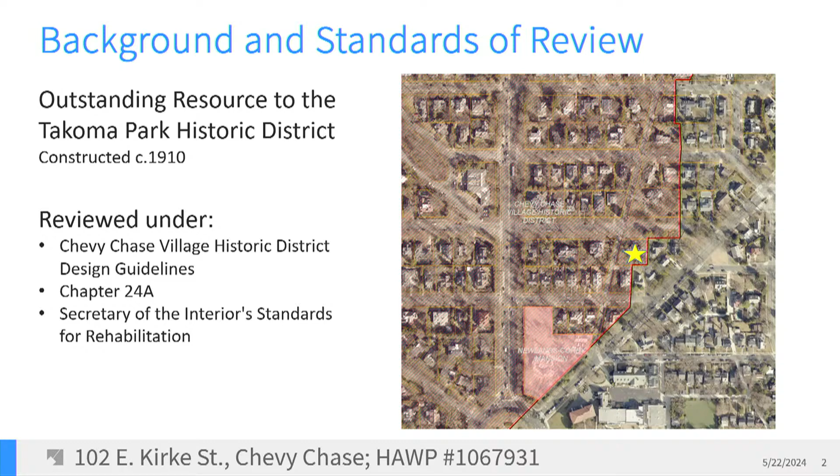Thank you. Please proceed. Okay. It's designated as an outstanding resource to the Takoma Park Historic District, constructed circa 1910, and again this is to be reviewed under the Chevy Chase Village Historic District Design Guidelines, Chapter 24A, and the Secretary of the Interior's Standards for Rehabilitation. So you can see it's on the eastern edge of the historic district line. Just familiarize yourself with the property.

The applicant proposes to demolish the one-story ell and rear deck, construct a two-story addition with a deck in the approximate location of the existing ell, demolish the existing garage and construct a new one slightly to the south, construct a swimming pool and associated patio, replace several existing windows, and there are also some trees that will be removed as part of the proposal.

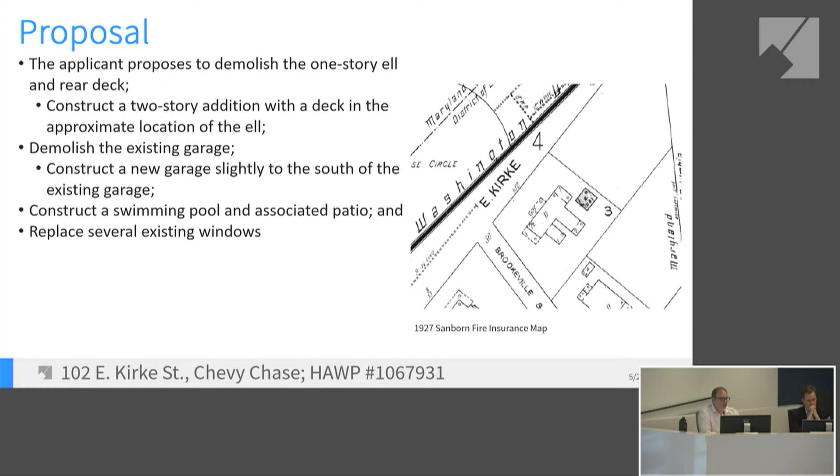Two meetings ago, on April 17th, we held a preliminary consultation on this very same proposal. The HPC was supportive of the partial demolition and agreed that the size, scale, massing, and architectural details of the addition were compatible. They were supportive of demolishing the garage. No one raised objections to the fenestration alterations on the two-story ell, and several commissioners recommended that the garage design be revised to include some of the architectural details from the historic one.

So we'll quickly go through the plans. These are substantially the same plans that you saw at the preliminary consultation. You can see that stone piers were added to the deck, which was one of the other recommendations from some of the commissioners. Again, the one-story portion was to be demolished.

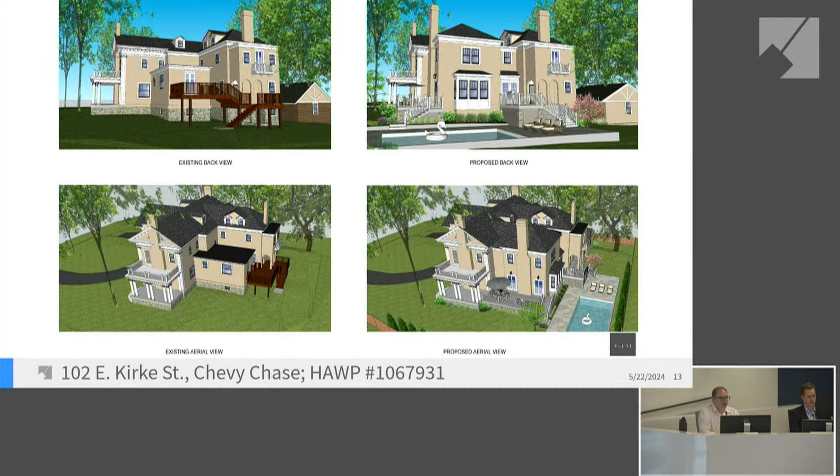Some existing and proposed views, and then the floor plans, and we can refer back to any of these, the new garage plans with the existing garage on the left.

Staff finds that the proposal is generally consistent with the feedback provided by the HPC at the preliminary consultation, and staff recommends the HPC approve the partial demolition and two-story addition under the design guidelines and Chapter 24A-8(b)(2).

Staff finds that the garage has deteriorated beyond repair and that the revised garage design is consistent with the HPC's feedback, and recommends that the demolition and new construction be approved under the design guidelines and 24A8B2 and standards 2, 9, and 10.

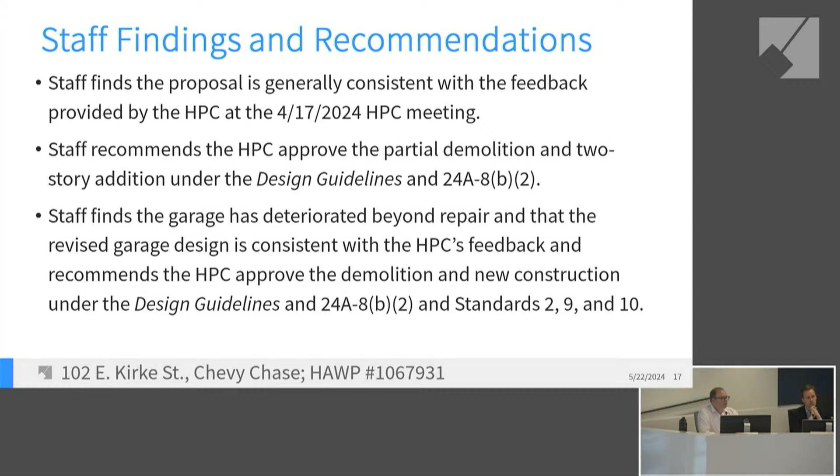Staff finds the proposed pool and patio are appropriately sized for the property and should be approved under a lenient scrutiny review per the design guidelines 24A8B2 and standards 2, 9, and 10.

Staff finds the proposed window replacement will not have a significant impact on the character of the house or surrounding district and should be approved, again, per the design guidelines 24A8B2 and standard 2, provided the HPC includes a condition that the applicant submits detailed drawings of the sunroom windows and the proposed replacement windows for review and approval, and staff recommends that final approval authority be delegated to staff.

Additionally, staff finds the proposed tree removals will not significantly impact the character of the site and surrounding district, and that the district's overall park-like setting will be retained.

The primary reason we're here is to discuss the materials proposed for the new deck on the western side. The applicant provided two materials for consideration: Acre, a manufactured product made primarily of rice hulls, and Aeratis Heritage decking, along with a Liberty extruded PVC railing.

Staff found that neither of those materials were appropriate and instead recommends the HPC require that these features be wood. Decks in Chevy Chase Village are to be reviewed under moderate scrutiny, which involves a higher standard of review than lenient scrutiny. Besides issues of massing, scale, and compatibility, preserving the integrity of the resource is taken into account.

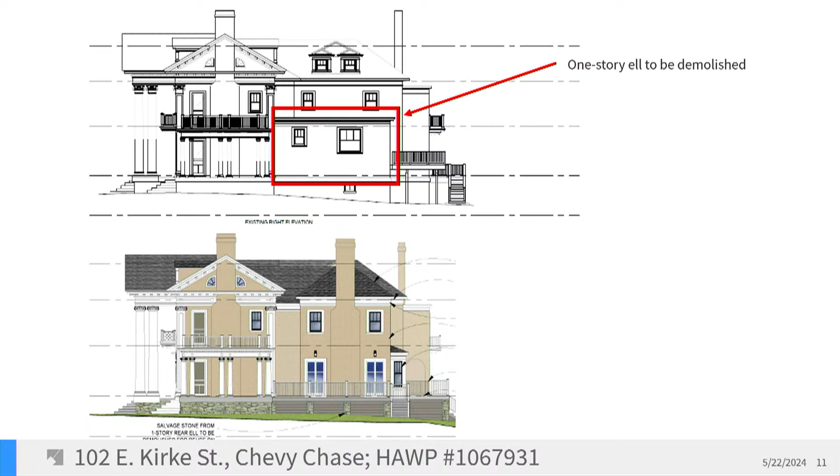We prefer to use a composite trim for that band board and skirting, but we defer to the commission on the appropriateness of final materials there. If absolutely necessary, that could be wood and it could be painted, and it's a vertical surface rather than a horizontal surface, so it's less likely to rot out as quickly as the decking.

But the decking itself just is going to have standing water on it. It's been our experience that those things just don't last no matter what you select.

I understand. How about the staircase that I see in this drawing that's in front of us? The short, maybe six treads. What do you propose for that?

It would be the same materials as the deck for the treads, and then the face would be whatever material we're using for the skirting, preferably a composite material such as Boral or Azek.

We're talking about Aeratis and/or Acre. Have you used any of these products in other applications, and do you have any experience as to longevity?

We've used Aeratis. I believe there's a project in 2012 at 3923 Washington Street in the Kensington Historic District, and the rear deck on that and the side deck as well were both Aeratis, if I remember.

I haven't heard any complaints. I drive by it occasionally. We do have another project down the street, so I can check in on it the next time I'm there. But I think it's holding up great.

I do know that in other historic projects where we've had some sort of other composite material that they've tended to last. In fact, we presented another case two meetings ago where it was a historic deck product, a composite deck product from, I think, the 90s, and it still is in pretty great shape.

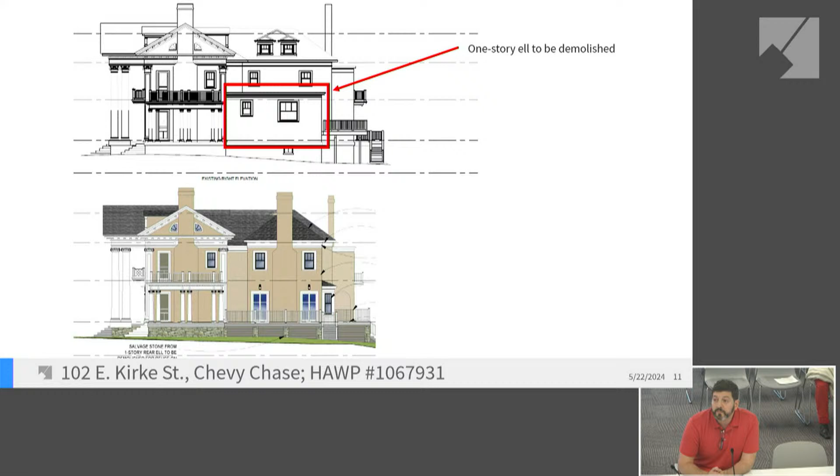Thank you. Any other questions for the applicant? No? Okay.

Any comments? Commissioner Radu: I agree with the architect about distinguishing between the historic and this, since this is still an addition. I understand that it abuts the historic property, but so do many additions where we allow other materials like Hardie planks or other materials. So to me, it seems like this is a compatible material.

It is an addition. I wouldn't agree to replace the deck at the historic porch if it would be wood and they would ask for replacement. I would disagree with that. But it is an addition, hardly visible, so I think this is a compatible material.

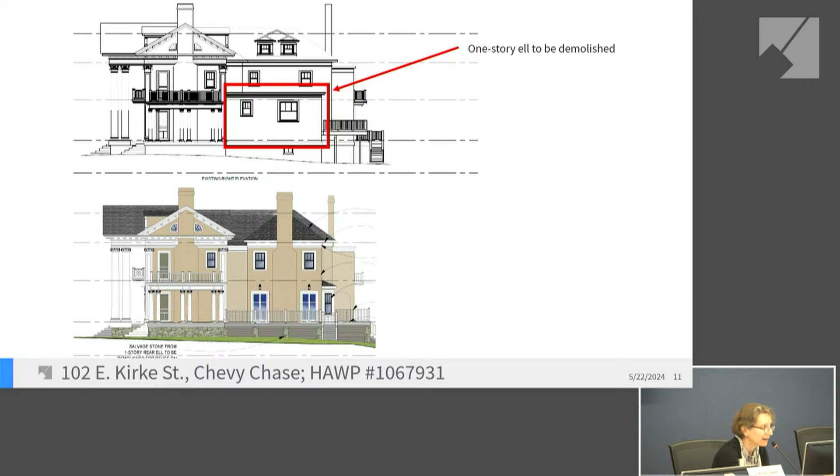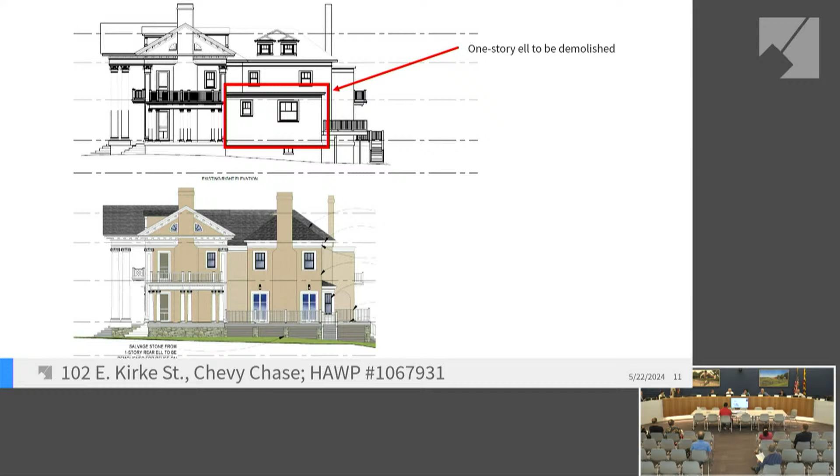Commissioner Doman: I guess I've spoken on this issue before. I'll speak on it again. I see absolutely no reason why this product can't be used. I'm all in favor of the commission adapting to utilization of new and more permanent materials on decking and or also for skirt boards and other items like that. I think this is the way the trend is going.

We have received comments from other LAPs also questioning the use of wood or the demand that the HPC puts out that it has to be wood. I think we have to move forward. There are new products out there.

I've personally seen the Aeratis at Oak Alley outside of New Orleans. It's been there for 7 years. It's painted. You cannot tell that it's not wood.

It is a perfect replica, and it's durable. It has stood up. The people down there, if you talk to them, will tell you this is the best product. I'm also in favor of it, as far as I can tell, a very good product is being used in other homes also in this area.

So I disagree with the staff report on item number 1, that it has to be wood, and I would approve this HAWP, deleting item number 1, but keeping everything else, which seems to have been satisfied by the architect and the homeowner.

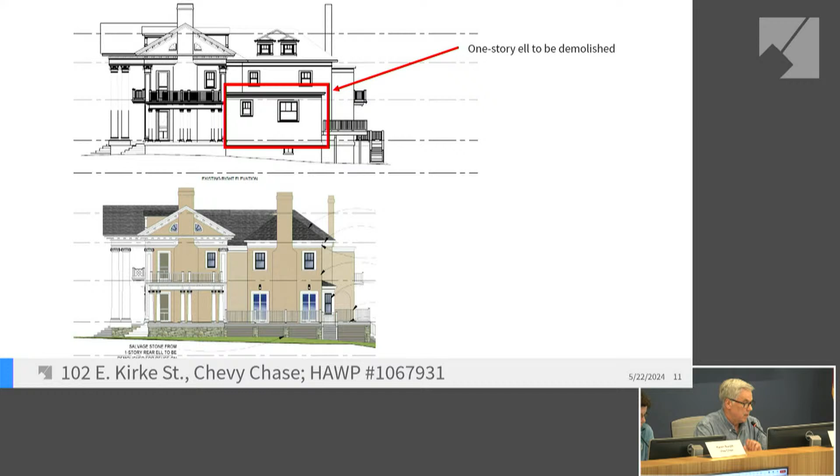Yes, the deck is sizable, you could have tables and chairs out there, certainly, and access down to the yard. I would be more favorable to composites if the new deck stopped basically at the corner of the family room, and that there was a space, a gap between the historic and the new deck.

So that it would not touch physically. I then could feel like I'd be more adaptable to using composites for the railing.

I don't think you're really going to see the deck from the street at eye level, even if the fence wasn't there, and you could walk the entire length of that. Just the horizontal perspective would be very difficult to see. So I don't think the deck itself would have an impact on the resource from the public right-of-way.

But I do think that if it were disconnected and truly was its own element to the addition, it would help distinguish the addition from the historic resource. And I think it makes this problem go away.

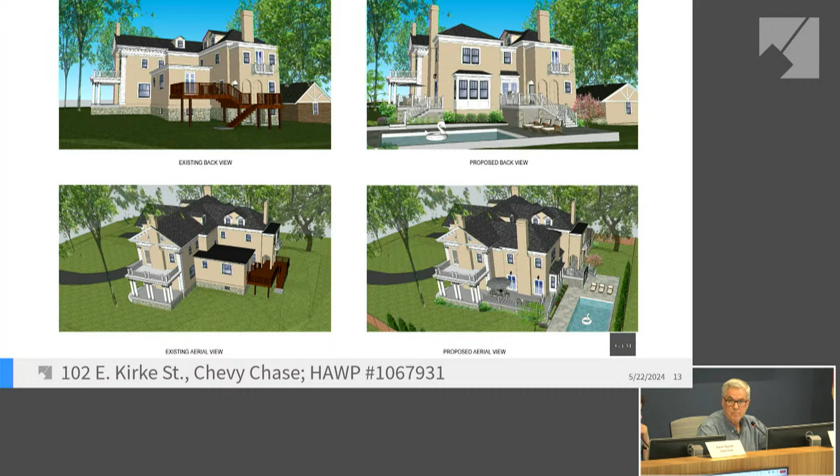Any other comments? Then I'll close this out with my comments. I was not here when this came for preliminary, so I can't really address any issues with the overall design that's already been discussed, other than the issue with this deck and the materials, and the fact that it's touching that historic property, the historic structure.

We are in the process of reviewing the materials for horizontal surfaces at decks and porches, and we've spent quite a lot of time on this, and it's not yet published, I guess I should say. If you'd come back in 2 weeks, it'd probably be published. But that's kind of where we are.

It is a significant topic, it has been for quite a while now. We are looking at materials, we are looking at how to handle this issue as related to the Secretary of the Interior standards with the historic districts, all the different historic districts we address, and how to handle this on a case-by-case basis. But it hasn't been published yet. We're not there yet, we're still dealing with our existing regulations and criteria.

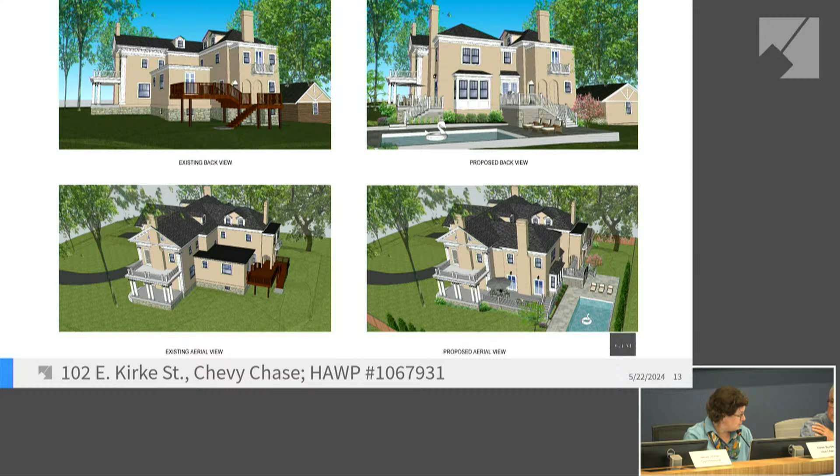Those are my comments. Would somebody like to make a motion about this? Commissioner Haynes? Or, yes ma'am. Madam Vice Chair, the staff would like to offer a few additional thoughts for the commission.

Whether or not we were dealing with a new policy, when there is a new material, a new substitute material proposed for the commission's review and approval, typically we ask for a material sample of that.

Members of the Alternative Porch Flooring Committee have had the opportunity to handle the Aeratis and some of the other materials being proposed, but other members of the commission have not. In a case like this, if we knew this was going to be a topic of conversation, we would have asked for material samples so everybody could consider durability, weight, all aspects of the product, how they do or do not mimic wood, and the construction methods for that material.

In the past, when issues like this have come up, either discrete design or material issues, commissioners in other cases have voted to approve the project except for that item under consideration, tabling it to come back at a later date with more information about the aspects you'd like to see. Or you can approve it as is, and the applicant can ask to amend the HAWP to address those other items or changes at a later date so they can prepare their building permit. These are some other options.

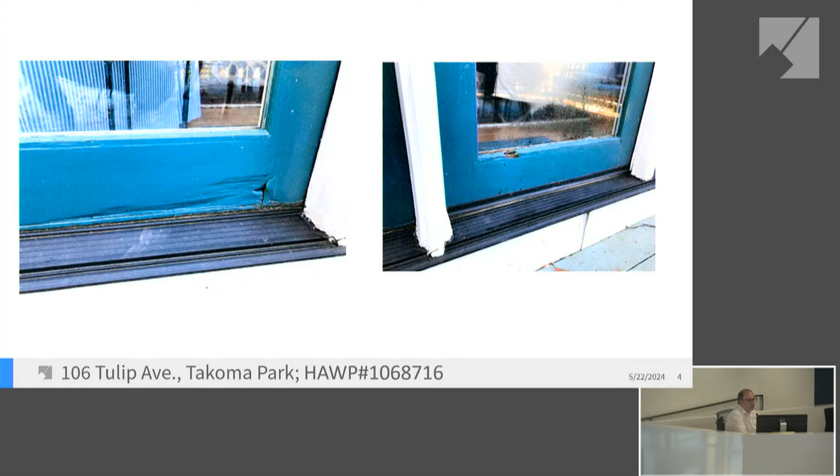This HAWP is to be reviewed under the Takoma Park Historic District Design Guidelines, Chapter 24A, and the Secretary of the Interior's Standards for Rehabilitation. The applicant proposes to remove and replace the existing wood French doors, shown here, which are showing signs of rot and failure. This opening was actually approved by the HPC in a 1995 HAWP, so the doors were installed in either 1995 or 1996. I don't have a date on whether this was later construction or was just enclosed later. The siding changes to a narrower reveal for the shed roof section.

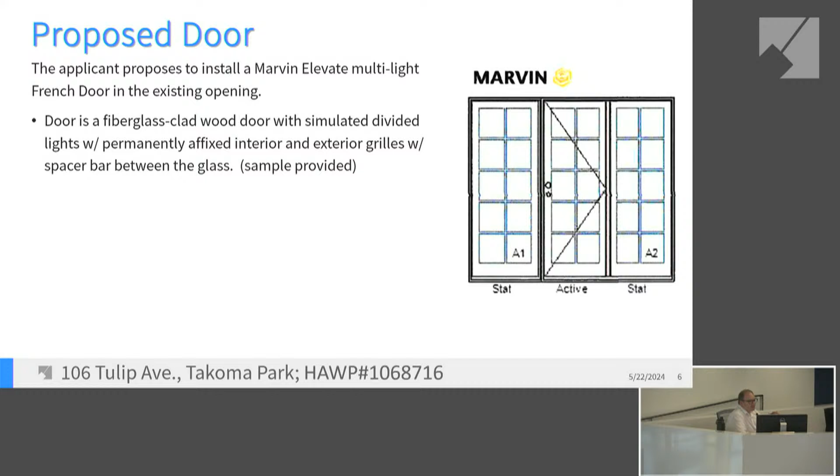The applicant proposes to install a Marvin Elevate multi-light French door into the existing opening. This door is a fiberglass-clad wood door with simulated divided lights, permanently affixed interior and exterior grilles, with a spacer bar between the glass. The applicant provided a sample, which I'll bring out and we can do show and tell shortly.

Staff finds that the subject property is designated as an outstanding resource for its association with B.F. Gilbert, not for its architecture. Gilbert, the founder of Takoma Park, lived at this property while he built his mansion, which subsequently burned down. Staff finds that the existing door opening is not historic, and the north elevation is not at all visible from the public right-of-way.

Staff finds that the existing wood doors have deteriorated and cannot be repaired, and removal is appropriate under 24A8B2 and Standard 2. Staff finds that a wood door would typically be required on an outstanding resource, but because this property is designated for its history and not its architecture, and because this is not a historic opening, and because this door is on the rear, staff finds that a wood or aluminum-clad wood door would be appropriate in this instance. Staff finds that the proposed fiberglass exterior does not have an appropriate finish to be an acceptable substitute for a wood door, as it is too shiny and will not dull over time.

Staff recommends that the HPC approve the removal and replacement of the door with the added condition that the replacement door be either wood or aluminum-clad, with final approval authority delegated to staff. With the recommended conditions, staff finds that the HAWP is consistent with 24A8B1, 2, and D, and Standards 2, 9, and 10. We could do questions or show and tell, whichever the commissioners prefer first.

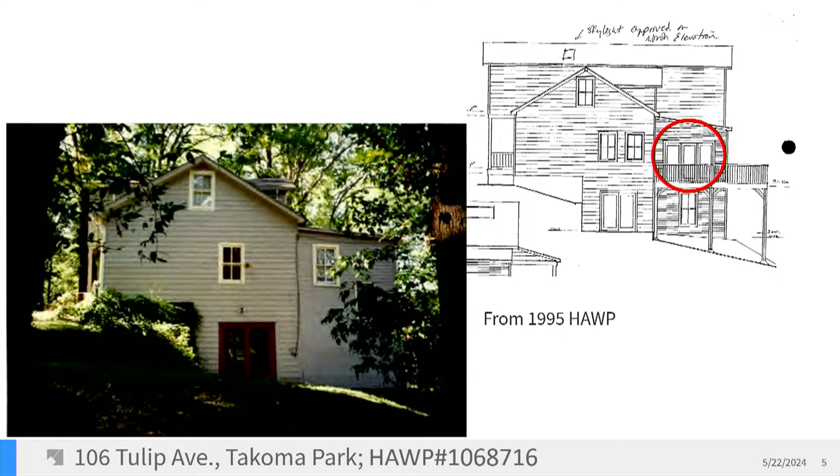Okay, thanks. I have a question for staff. Did I hear correctly that the addition this door is going into is not known, that it's not original, or the age is not known? The age of the portion of the house is unknown, but we can date the opening from our own HAWP records. The image shown comes from the 1995 approved HAWP, which actually created this opening that you see circled in red. So the structure the opening is in is of an unknown date.

Correct, it could be original to the house or not; you just know it's older than the date of the opening. Correct, we don't know the original date of construction for the house, full stop, but we also don't know the age of construction of this portion of it either. Okay, thank you.

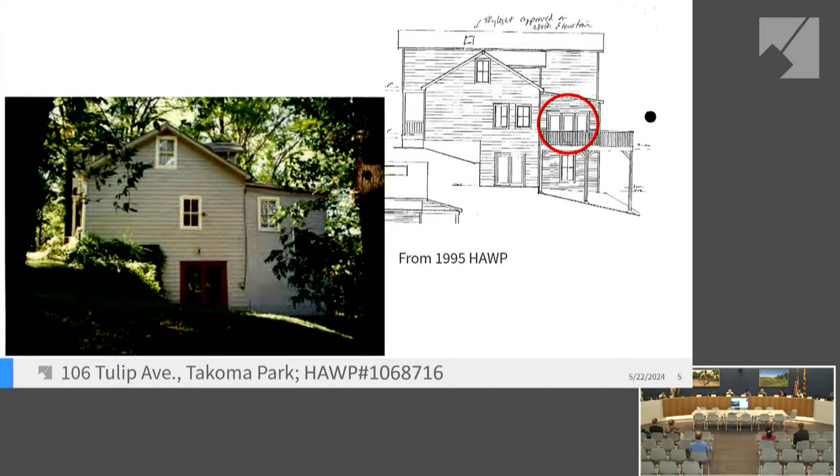Commissioner Haynes. Thank you. Is this door visible from the public right-of-way? No, not at all. Between the change in grade and the distance, conceivably you could—I mean, you can't see it from here, it's too far from the right-of-way. That would be the view if the topography cooperated, but no, it's not at all visible from the right-of-way. Thank you, any other questions?

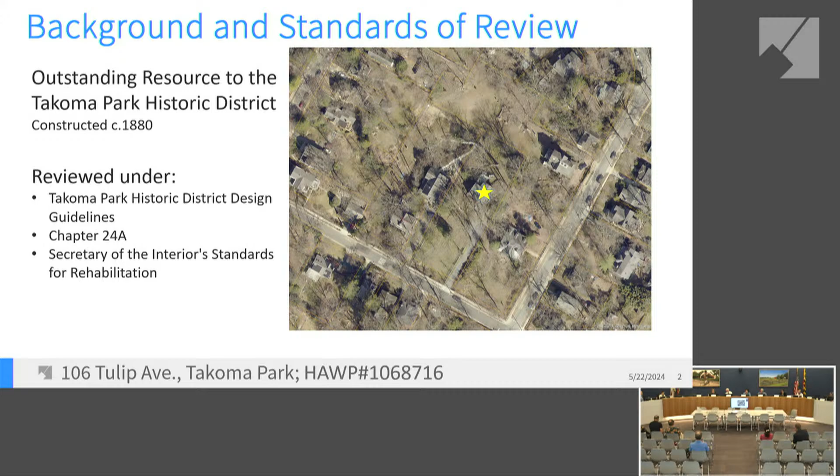If not, the applicants, if anyone's coming forward here live, please do so. If not, the applicants that are on the cloud, or calling in, would you please identify yourselves and your relationship to this project? Thank you.

Hi, good evening, ladies and gentlemen. This is John McDermott, representing Louise Klee for 106 Tulip Ave. I am the contractor who has been helping her with this door and has filed the permit with you guys as well.

I understand there were a couple questions as far as the finish on the fiberglass clad product. It is a matte finish. It is also a full glass door, so there's not much fiberglass at all in the entire product.

It is a very long driveway up to the front of the house. Driving down or walking down that street, there is no sidewalk, it's just a road. I've not been able to see, driving down that road, even remotely close to where the back of the house is. And from my understanding, that was an addition built on the house in 1995. It was stated as a non-historic opening.

Yes, there'll be a very brief staff report this evening. So again, this is a preliminary consultation for Hoyle's Mill, which is a contributing resource to the Boyds Historic District. You can see the lines of the district were drawn to specifically capture this building, which was constructed circa 1915, and it's reviewed under Chapter 24A, the Secretary of the Interior's Standards for Rehabilitation, and the MARC Rail Communities Sector Plan, which was adopted in 2019.

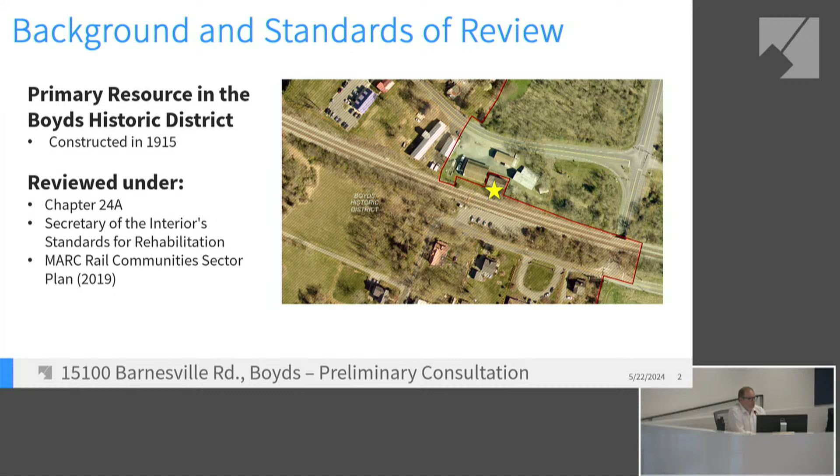So the proposal is to stabilize the building foundation by filling the basement level with a flowable fill concrete. A 2019 assessment found the building to be in poor condition, including holes in the roof and windows that allowed water infiltration. Additional structural deficiencies at the foundation were determined to be the biggest threat to the building's stability, including areas of missing stone, which allowed soil to begin to fill the basement. Last August, the HPC held a preliminary consultation to evaluate the proposed work and to solicit input on a preservation plan for the site.

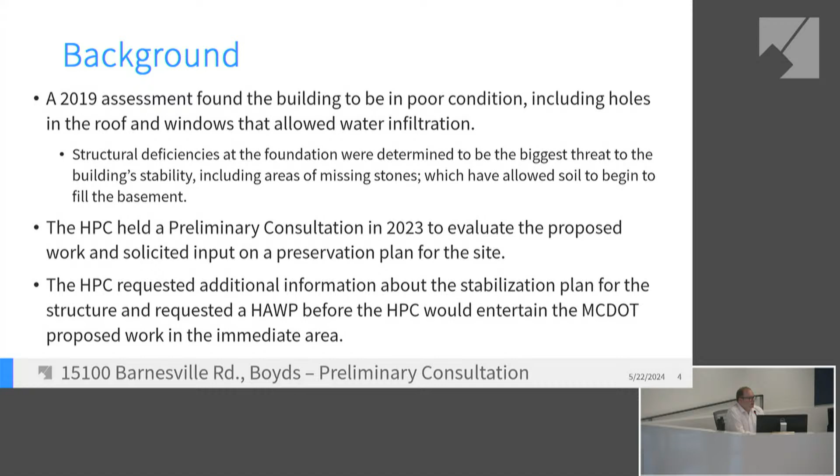The HPC requested additional information about the stabilization plan for the structure and requested a HAWP before the HPC would entertain MCDOT's proposed work in the immediate area.

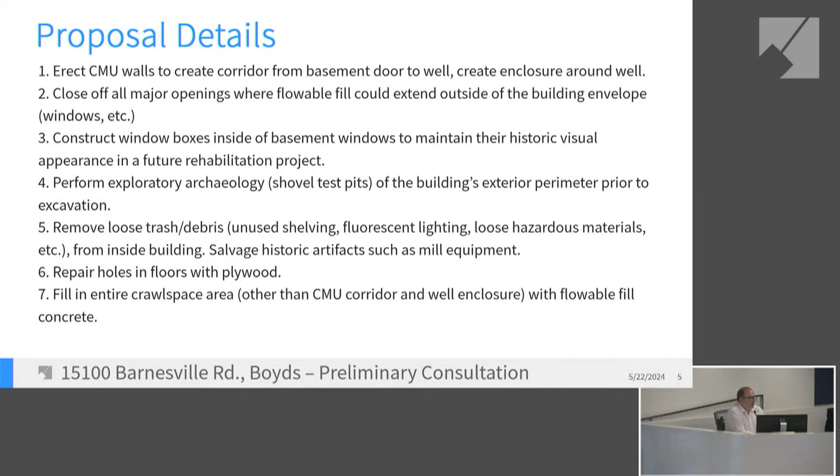Remove and discard the steel stair platform, remove all the power lines, install plywood panels with louvers in the windows, remove and replace deteriorated basement doors and frame with a new steel door and frame, and demolish and replace the existing site stair leading down into the crawl space—although some of these things have changed in the interim—and then clear up any insects and other biological pests.

Staff finds that the existing foundation is failing and the basement is being infiltrated by soil, water, and biological pests, and that the stabilized foundation will allow site access leading to a full-scale rehabilitation and adaptive reuse of the building.

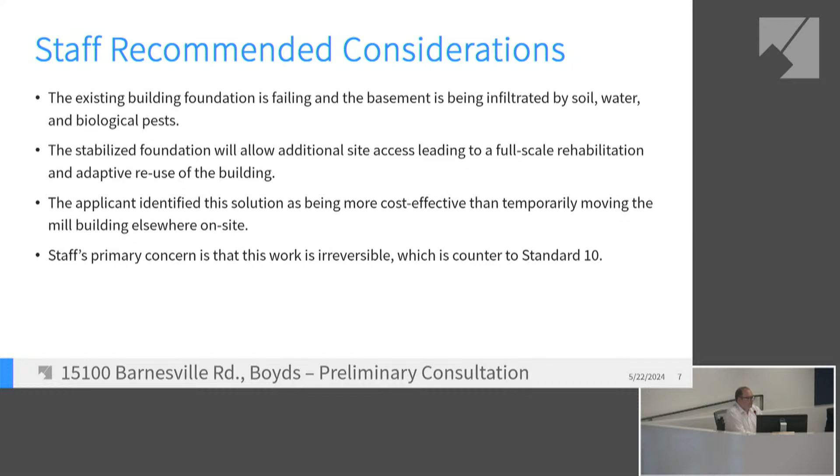The applicant identified this solution as more cost-effective than temporarily moving the entire mill building elsewhere, either on-site or off. While staff is not an engineer, our primary concern with this concept is that the work is irreversible, which would run counter to Standard 10. But there are a number of other considerations we've identified and discussed at previous preliminary consultations.

So the four primary questions for the HPC during this consultation are: does the HPC have any concerns about the proposed work in addition to those identified by staff? Does the HPC find the proposal appropriate under the circumstances? Does the HPC require any additional documentation or calculations with a final HAWP application to stabilize the foundation? And are there any other courses of action the HPC would like the applicant to consider to stabilize the foundation? I will answer any questions you have at this time.

Are there any questions for staff?

Commissioner Burdett: I just want to confirm there were no other alternatives presented. Staff: Correct, this was the proposal presented to staff in this preliminary consultation. If your question is whether other proposals were considered and rejected, that's a question for the applicant, staff can't answer that. Burdett: Yeah, you didn't reject it. Staff: Correct, it was rejected before it got to you.

All right, there are no questions for staff. We'll move on to a presentation by the applicant, who all work for WRA: Brian Barna, Lonnie Hovey, and Pam Destino, joining us virtually. Please give your presentation, and whoever is speaking, identify yourselves and your relationship to this project.

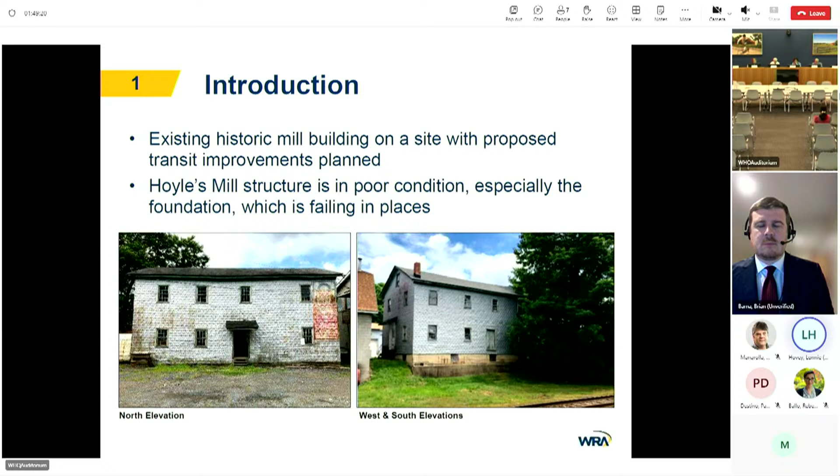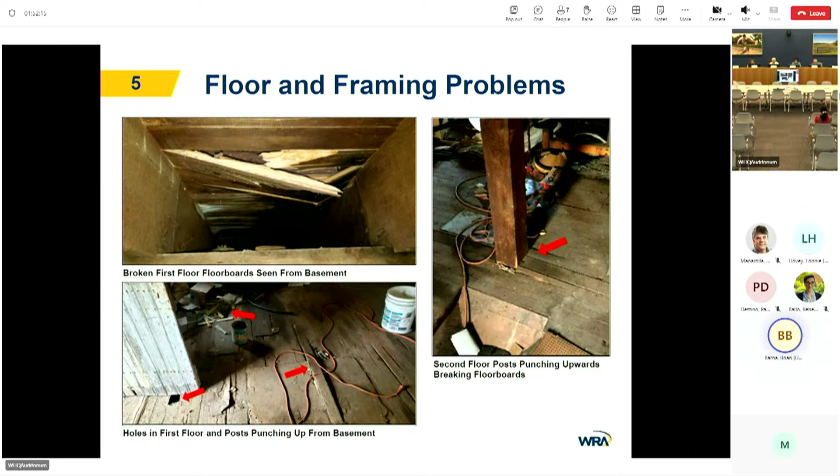So what we are proposing is a foundation stabilization option, and this would consist of flowable fill concrete installed up to grade level, which would retain a small crawl space below the first floor and keep the concrete off of the first floor historic wood structure. Everything we're doing associated with the flowable fill structural stabilization would have no visual impacts to the building exterior.

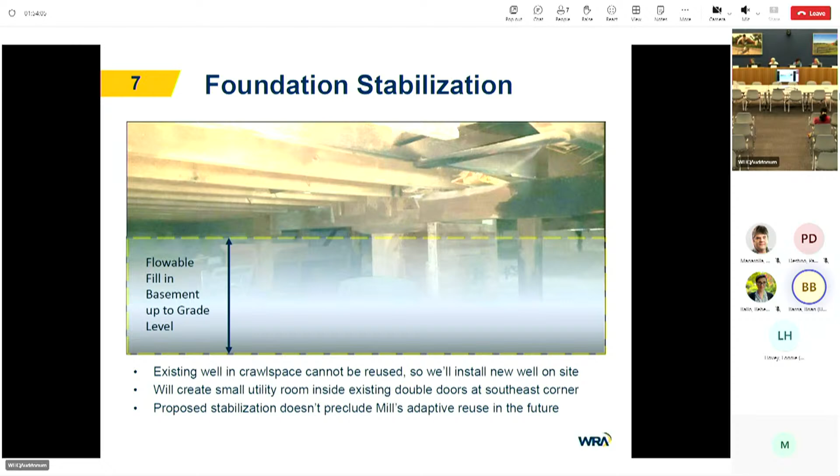Just a couple quick notes on flowable fill. It's essentially concrete, but it's a very low viscosity concrete that will flow into place and requires no compaction.

We're offering this up as an option because the flowable fill will fill in the gaps in the failing foundation and essentially create a new mat foundation for the structure, offering stability for the entire structure and preventing additional differential settlement or further damage to the structure.

We are proposing that first the floorboards of the first floor be temporarily removed, and then the flowable fill can be pumped directly through the first floor into the basement for the protection of the contractors, because they would not need to be in the basement during this work, and it provides good visual control of the flowable fill during construction.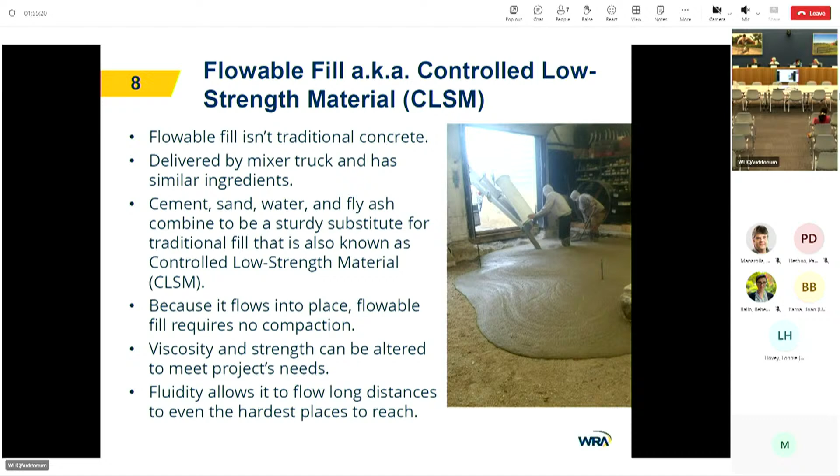The existing doors and stairs are all there, but they've also deteriorated over time, and the stairs and cheek walls have all cracked and need to be replaced.

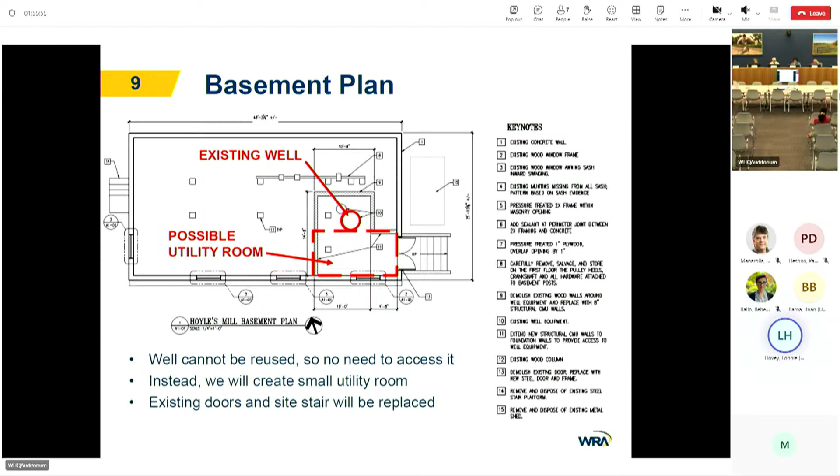There are 4 basement windows, currently boarded over. The remaining original material includes the window frame and sash frame, but no glass or muntins remain. Marks on the sash frame indicate the basement windows had 2 rows of 3 window panes each.

To prevent the flowable fill from going out the windows, we propose creating window boxes behind the existing windows. This will create 8 inches of space, and future restoration of the windows would be done from the outside to retain the look and character of the original windows.

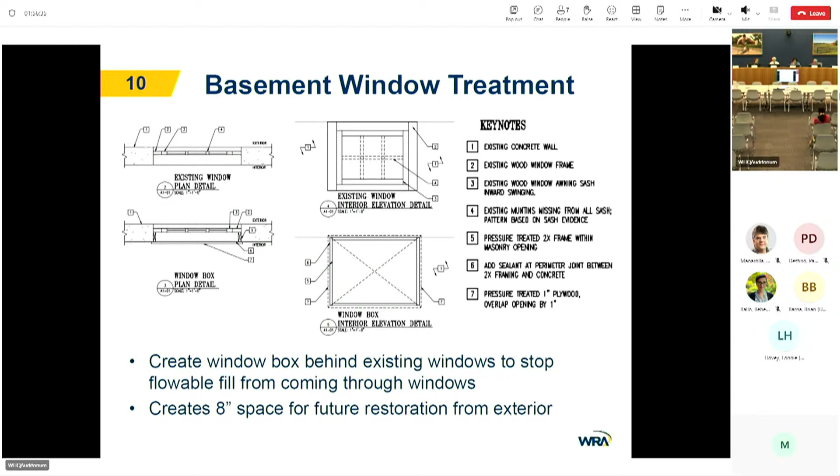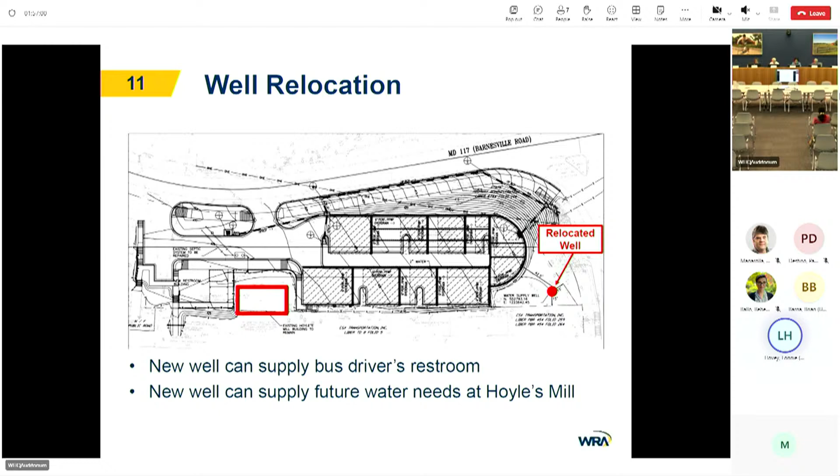Thank you for this opportunity to present our stabilization plans to you.

Thank you. Are there questions for the applicant? Jeff Haynes, Commissioner Haynes? Yes. How much space from the bottom of the floor joist to the top of the concrete fill are you proposing?

Right now, to get up to the mill, there's a couple of steps at the front door and larger steps on the west side because the site slopes downward. But the crawl space would be somewhere between 18 to 20 inches.

Okay, it's kind of tight if there's plumbing work there that might need to be serviced down the road, or other utilities that might need to be serviced. And if you've ever been in an 18-inch crawl space, you better be a pretty thin person. So that's just one functional question. But why do you need to come up that high? Why can't you fill to the top of the existing stone wall?

And is it really about mitigating the soil intrusion into the foundation, or are you tying the existing foundation walls together so that it's this big block of concrete and masonry, and addressing more the structural rationalization for filling it up that much?

Commissioner Radu? Yes, thank you. I'm looking at the package foundation plan drawing, 1S1-01, and you noted that the wall that's in poor condition is on the north side. I saw a section through that well room, and it seems like the northern part is really where the crawl space is, but the southern part is where the windows are, and it's like 8 feet—it's not 2 feet, not just the 3 to 4 feet on the other side.

So I was wondering if you considered some other solution where you would really reinforce the north side, but not infill all of the southern part, which doesn't seem, from what you were talking about earlier, to have as much damage as the north side.

Brian, do you want to mention the prior concrete block that was put in to try and stabilize the north foundation wall that has failed? Yes. First, in looking at this photo, you can see it's not just the north side—it's really all sides that have this original stone masonry foundation entirely eroding, with the unreinforced concrete wall on top of it. Actually, the south wall does have a secondary wall that was built outside of it already to act as a retaining wall. Lonnie, or Pam, do you want to move to the slide that has this concrete mass?

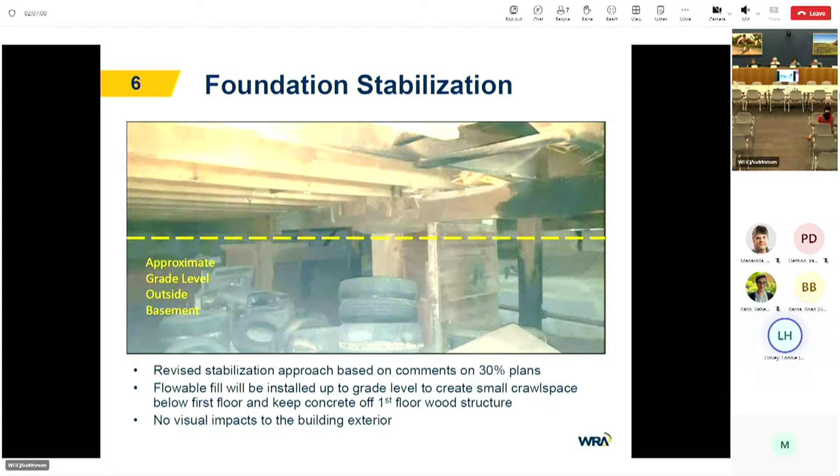Yeah, in the... oh, you had it. Go back one more, go to slide 3. Yeah, right there. Slide 3. In the bottom right, you can see just past that axle with the pulleys, there's a large white block.

Previously, someone installed a 40-inch deep and 36-inch high concrete mass against the existing rubble wall, we believe as an attempt to shore that up, and it has failed to stop the soils from washing into the building. That 40 by 36-inch mass, roughly 20 feet long, is now rotating out of plane because the soil is washing in and moving that block of concrete deeper into the basement. So the idea of trying to stabilize the interior foundation walls with new reinforced concrete foundation walls with buttresses, trying to shore that up, has been attempted and has failed internally. Really, the only wall keeping the mill from sliding down the hill to the tracks is that south external retaining wall that was added at some time.

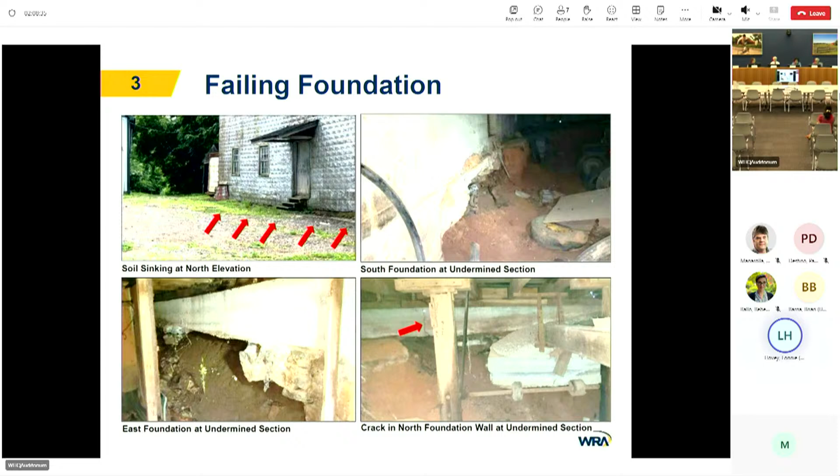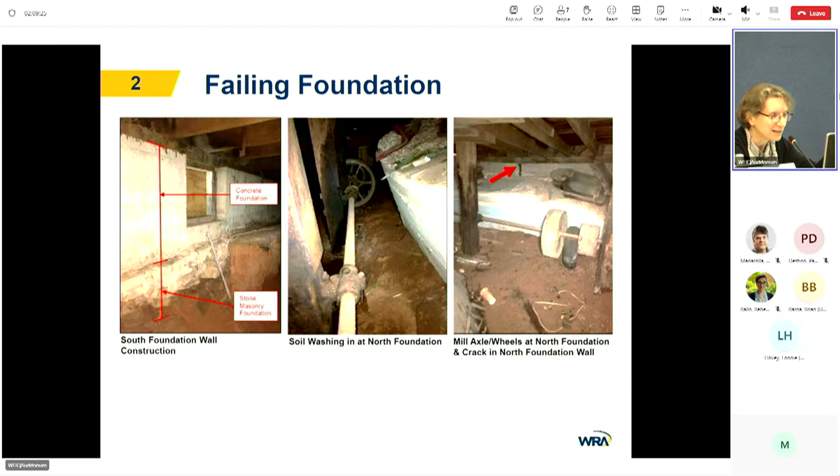Commissioner Radu: I do have one, just to follow up on Commissioner Haynes' question about the possibility of really on the south side doing a mat foundation. I don't know if mat foundations work in steps, since I'm not a structural engineer, but if the infill would be done just at the level of the stone masonry foundation or a little above, just to spare those windows and not infill. I read some of the concerns of the Historical Society or Foundation, and I agree with a lot of their concerns about moisture, about irreversibility. It seems like the solution still raises a lot of questions.

This is Commissioner Burdett, and I'd like to ask a couple questions before we do a round two. Is the floor of the crawl space soil, concrete, or stone? Soil. So what is to prevent, if you pour this big thick mat of concrete down there, the soil from continuing to wash out from underneath that? And how are you tying this whole thing into the existing walls? How are you ensuring that by pouring this against the existing walls, you don't risk blowing the walls outward? Because all you're doing is keeping them from forcing inward, collapsing inward.

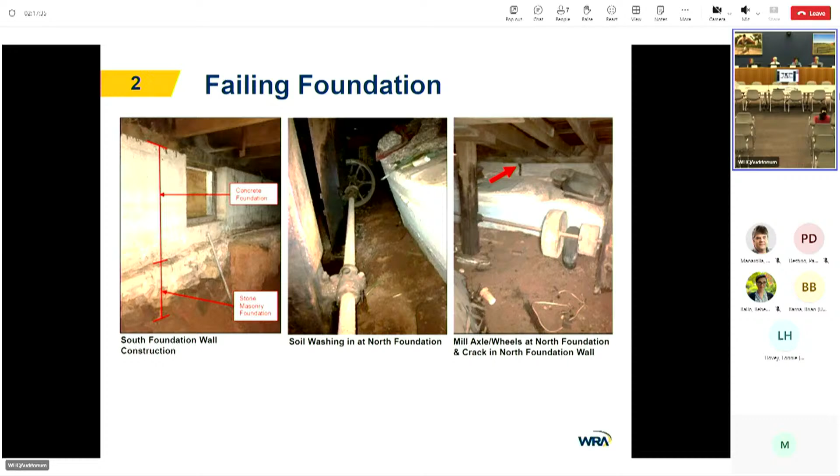I understand what you're trying to do here, but none of us are structural engineers, though we do have a lot of architects and preservationists up here. I am not comfortable with this proposal because there is a shortage of technical information related to how this is going to work structurally. You are basically telling us we're going to pour a lot of concrete in the crawl space and it's going to work, and you're not addressing water penetration after it's poured, or reinforcement anywhere inside or out. You're not telling us what's going to happen before this pour to channel water away from it. You've basically said this is the fastest, cheapest way to do this, and I'm not comfortable with that.

I'm not comfortable with the fact that you are limiting the adaptive reuse of this building, because you are limiting what can be done in that crawl space as far as piping, ventilation, and repairs, with material down there rotting out with no way to deal with it or even know it's happening until it's too late. This is what's concerning me about this whole process.

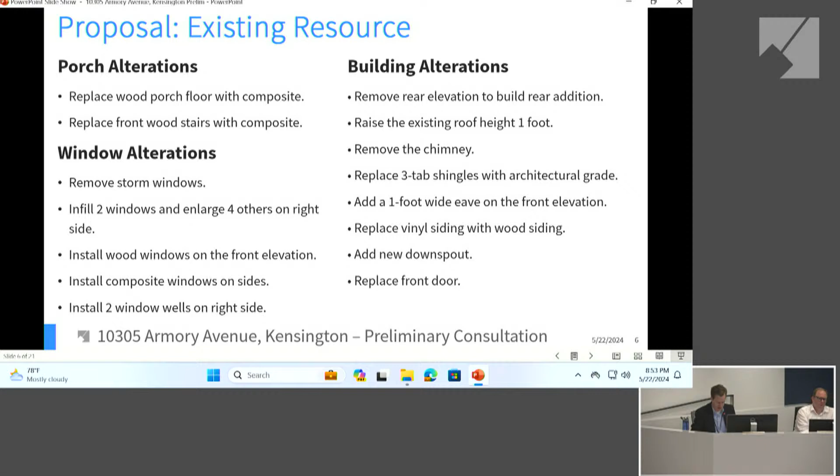The rear wall is to be removed to accommodate an addition we'll get to shortly. The roof will be elevated 1 foot. The chimney will be removed. 3-tab shingles will be replaced with architectural grade shingles. A 1-foot eave will be added to the front. The vinyl siding will be replaced with wood. New downspouts will be added, and the front door will be replaced.

For the rear addition, it will be 2 stories tall with a basement. The footprint measures either 27 by 24 feet or 28 by 23 feet. The final shape hasn't been decided yet, but the addition will be around 1,300 square feet. For reference, the existing 1-story house is approximately 1,100 square feet.

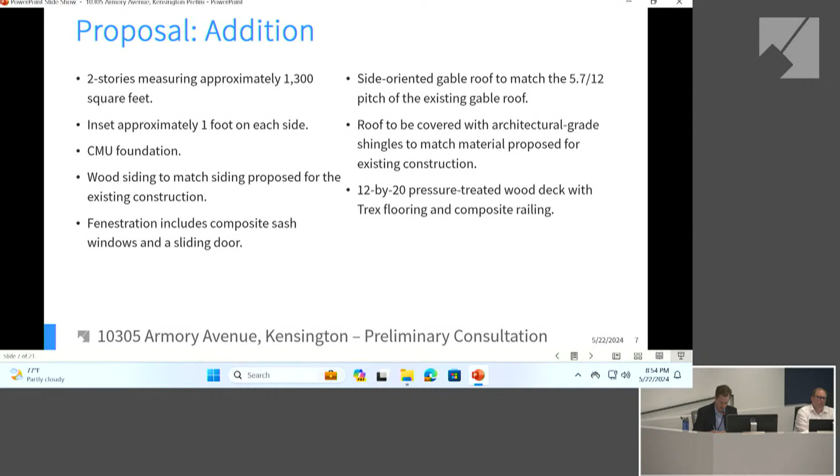It will be inset a foot on each side. It will have a CMU foundation, with wood siding to match the siding proposed for the existing building. The sash windows and sliding door will be composite. It will have a side-oriented gable roof that matches the 5.7/12 pitch of the existing gable roof. The roof will be covered with architectural grade shingles to match the existing house's roof, and a 240 square foot deck with Trex flooring and composite railing will be built off the back of the addition.

For the grounds, hardscaping and landscaping: the brick patio, 3 trees, and a fence segment are proposed for removal. An areaway and concrete pad are proposed along the new addition. The curb cut along Armory Avenue will be shifted over, and an 11-foot wide concrete drive will be laid to that outbuilding. A concrete parking pad will be laid next to that garage building as well. Stone pavers will be laid to link the proposed deck to the proposed driveway, and HVAC units will be installed to serve the new addition.

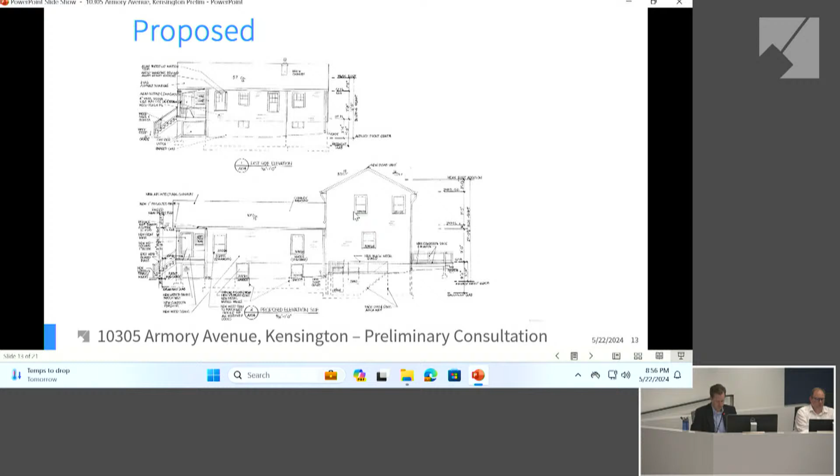Staff does not support a number of the alterations proposed for the existing resource, including replacing the wood porch floor and stairs with composite, raising the roof, removing the chimney, adding an eave to the front of the building, infilling two windows and enlarging four others on the right side elevation, installing wood windows on the front elevation, and installing composite windows on the side elevation.

The property has a simple design and has been altered, but it is a primary 2 resource in the Kensington Historic District, and alterations that further damage the building's form and character should be avoided. Staff finds that all this proposed work conflicts with 24A-8B of the County Code because it will substantially alter the exterior features of the resource and is incompatible with its character. The proposals also run counter to the standards, which call for alterations that do not destroy the historic character of a property. Staff instead recommends the applicant retain and repair the chimney, porch floor, stairs, and windows.

On the other hand, staff supports removal of the existing rear elevation to accommodate the proposed rear addition and finds that proposal to be compatible with the character of the resource. The door on the rear elevation does appear to be original to the home's construction, and staff recommends the door be installed at either the front or on the new addition.

We also support replacement of the existing 3-tab shingles with architectural grade shingles. Staff regularly approves this work administratively.

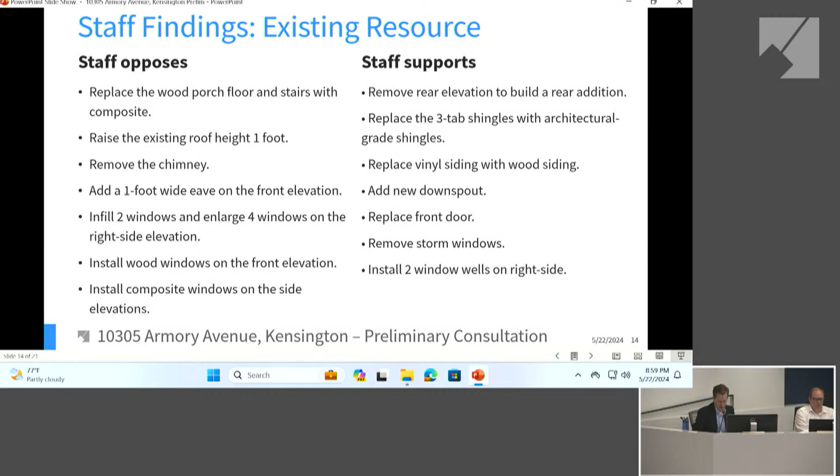We support the installation of additional downspouts; that work is regularly approved administratively. We support replacement of the front door and encourage the applicant to reinstall the door removed from the back elevation there. We do support removal of the storm windows, but encourage those to be retained if possible. And in theory we support the window wells on the right side elevation, but would like more detailed drawings on that.

For the addition, staff supports a rear addition at this property, but not as proposed, in conflict with 24A-8B2. The proposal is incompatible with the character and architectural features of the historic resource, and contrary to standard number 9 for new additions, staff finds the size, scale, and features are incompatible with the existing building. The new addition will be approximately 11 feet taller than the existing, and staff recommends the addition be reduced in height so it does not visually overpower the existing.

The front-oriented gable roof clashes with the side-oriented gable roof on the existing building, and staff recommends the orientations match. Staff also seeks evenly spaced window openings on the addition, particularly on the side elevations, and seeks wood or aluminum-clad wood windows on the addition, not composite as proposed. Staff supports the pitch of the addition's roof and its covering with architectural grade shingles.

We also support the differentiation created by the addition's wider roof overhangs, the sliding door, and the wood siding, as long as it doesn't match the existing. And we also support the proposed deck on the back.

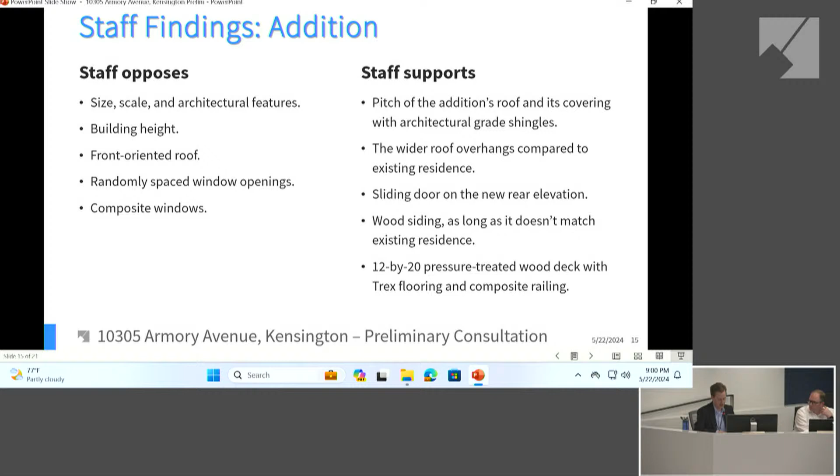Staff supports all proposed changes to the landscaping and hardscaping and finds the work will not substantially alter the historic resource and is compatible. We would like an arborist report for the trees to be removed. We also recommend the driveway be reduced in width from 11 feet to minimize the amount of pavement added to the property. Staff seeks more detailed plans for the areaway.

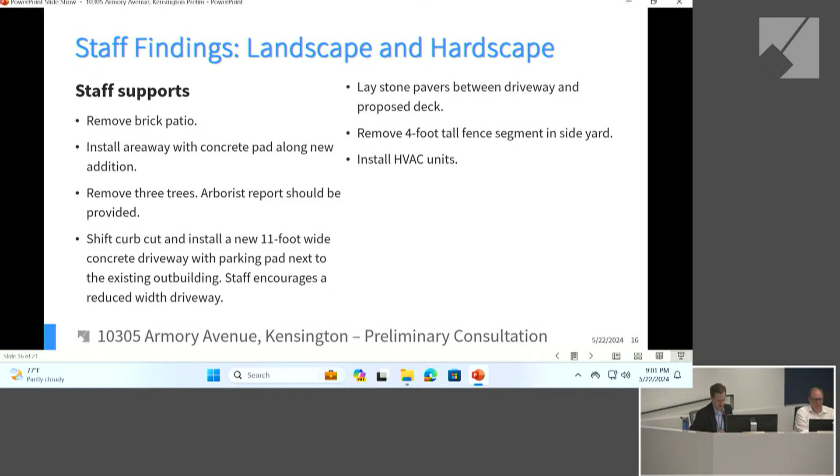Staff recommends a second preliminary consultation, and the resubmission should address everything in a single narrative. We need to know the final size of the addition, and the drainage, which is still to be worked out. We need detailed drawings for the areaway, deck, and window wells, a window and door schedule, specification sheets for all building features, photos and a statement on the material, design, and condition of the cladding, or lack thereof, underneath the vinyl siding, and a comment response sheet.

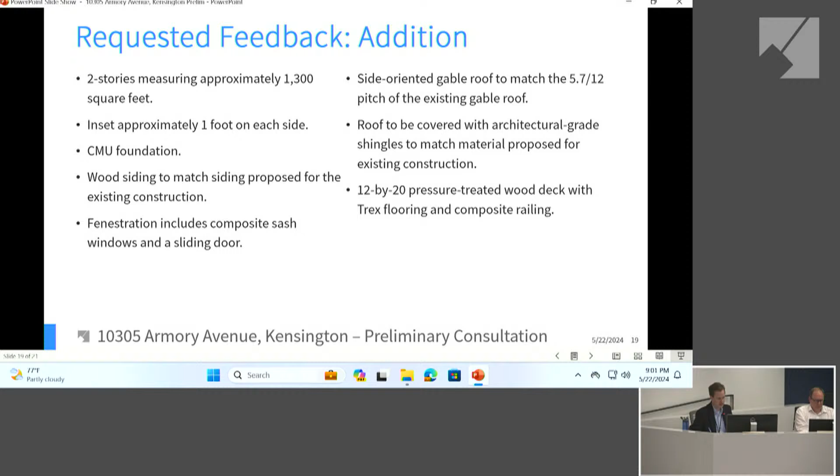And of course, an arborist report for the 3 trees. So the next 3 slides list all the changes for your reference that we seek your feedback on: the porch alterations, the window alterations, the building alterations, the feedback on the addition, and then the feedback on the hardscape and landscaping, if there's any.

So any questions for staff? Are there any questions for staff? And because it's getting late, can we be very specific to just the questions?

I have a quick question, more like a confirmation. So the existing building is sitting right at the property line and the proposed addition is set back by 1 foot. Am I reading that correctly? Correct, yes. So there are no required setbacks for additions?

I am going to ask Rebecca, do you mind? I'm sorry, can you please repeat the question? Rebecca, there's a 1 foot setback, I understand that the existing building is sitting at the property line and there's a 1 foot setback for the addition. Are there any setback requirements, do you know if there are any setback requirements?

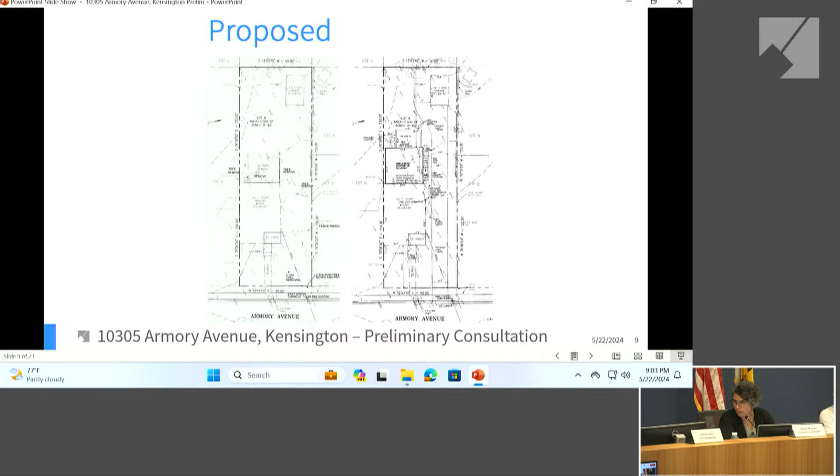Yes, typically for interior lots, the setback requirements can vary between 8 and 10 feet. The town of Kensington has their own setback requirements within the zone. I will look those up. Thank you. But understanding any sort of final answer on that will be up to the town of Kensington, and that's something we typically do with these cases.

Brookeville, for example, has their own town zoning, so we ask the applicants to affirm that the setbacks meet any additional requirements from the locality, and then come back with that as part of their prelim. But I'll check right now. Thank you.

Commissioner Doman? Staff, are you recommending wood windows in the front, or are you opposed to wood windows in the front? The point there is to retain the existing windows, because right now they're wood, so we would like those to be retained and not removed, unless there's evidence that they're damaged beyond repair, which we don't have at the moment. So your recommendation is, if it's replaced, it should be wood windows? We're recommending retention and repair of the existing. Okay.

I have an answer to this, Rebecca Ballo for the record. Looking in the town of Kensington's ordinance, it says for all setbacks and building lines, the town of Kensington shall follow the laws of Montgomery County except as set forth herein for side yards, unless a variance is granted in accordance with this section. No dwelling or any part or projection thereof erected on land zoned for single-family residential use shall approach nearer than 10 feet to either of the sidelines of the lot on which said dwelling is located or is to be located, or nearer than 15 feet to any other dwelling, subject to the following exceptions: when building an addition with a footprint of 650 square feet or less, one side of the addition is permitted to conform to no less than the existing dwelling setback on that side, or 7 feet, whichever is greater. And then it talks about a sum total.

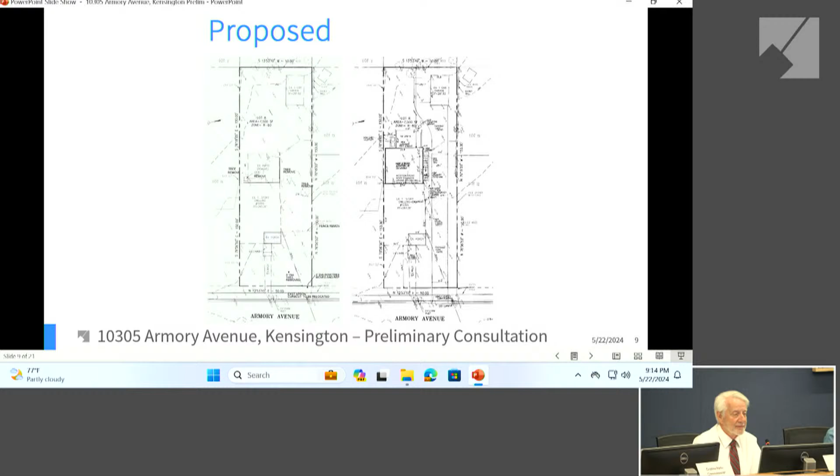Any other comments? If not, Commissioner Haynes, are you going to have any comments this time? Yes.

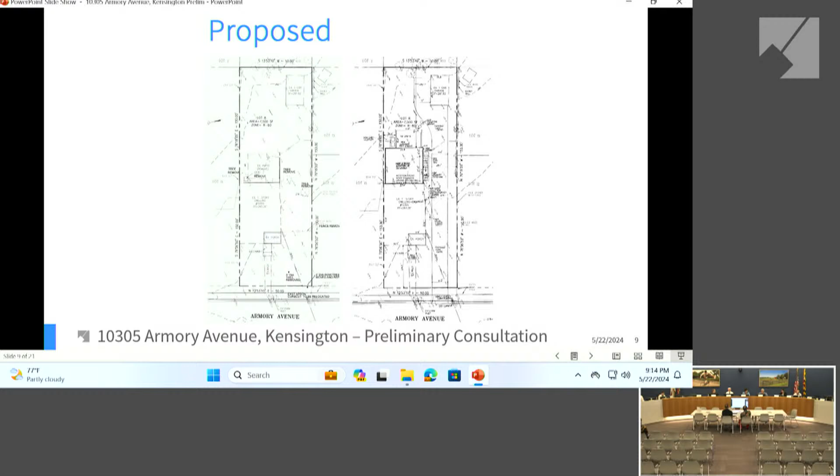My comments are surrounding the addition relative to the original structure. It's a challenge to put a two-story addition on a one-story historic home. I probably don't need to tell you that. But as it's currently designed, it feels like there's the historic one-story home, and then this two-story structure plopped on the back, and they don't integrate well at the moment.

It might just be that the drawings need a little more clarity, but I think the massing of the addition is a bit overwhelming to the one-story house. I understand you're raising the existing roof a foot, presumably to help mitigate that, but I'm wondering if there's a way to lower the new addition roofline to get better proportion with the historic resource, and then maybe utilize dormers to get additional headroom on the second floor.

Also, I might ask, have you looked at just doing a one-story addition and having all the program on one level instead of two stories? You have a fairly large property. It seems like there would be room to get all your program on one level instead of doing two stories.

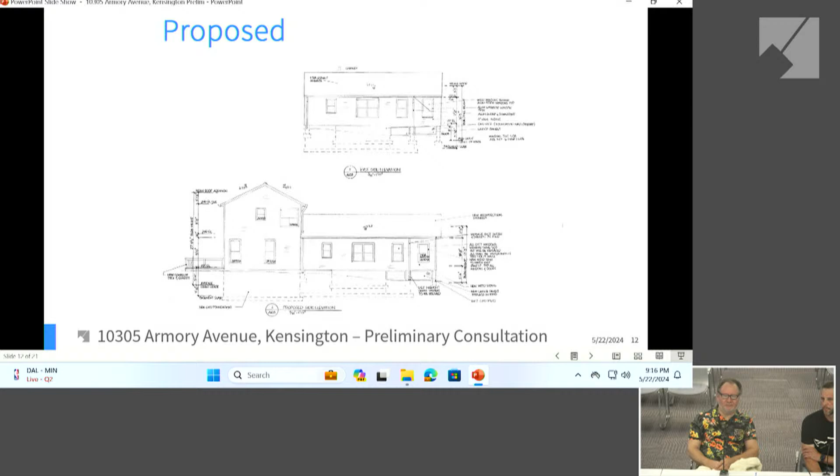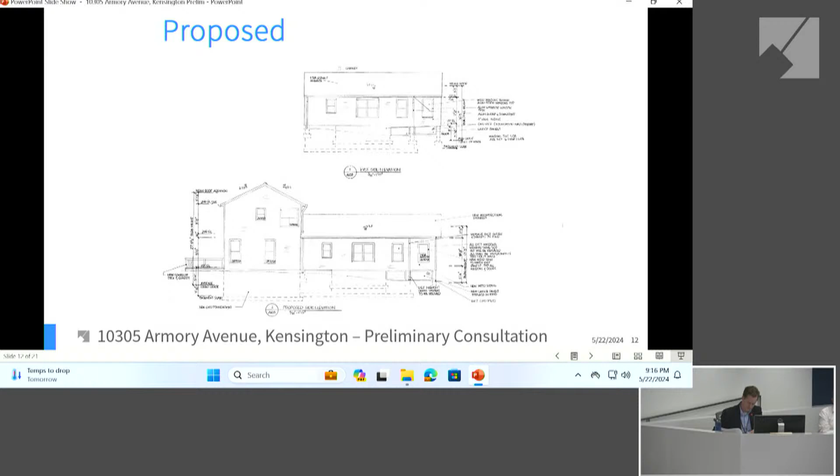It's approximately 1,100 square feet, 42 by 28, I think, is the house, or something like that. For the addition, existing footprint? The existing or proposed? Proposed addition footprint. Oh, it's either going to be, let's see, they have two different numbers provided. It's a little under 650. We just try to stay around there. Yeah, around 650.

So I hear you that it kicks in, a one-story addition kicks in different setbacks. But I think my overall comment is surrounding the massing and getting that a bit more proportionate to the one-story resource. There are so many questions, but I think it has to start with getting the addition massing right, and then we can build from there.

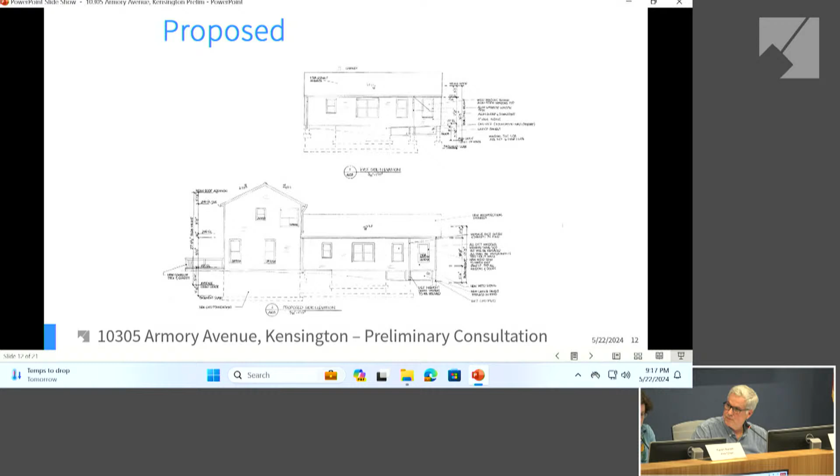That's my comments. Okay, I think I'll finish up here if there's nobody else.

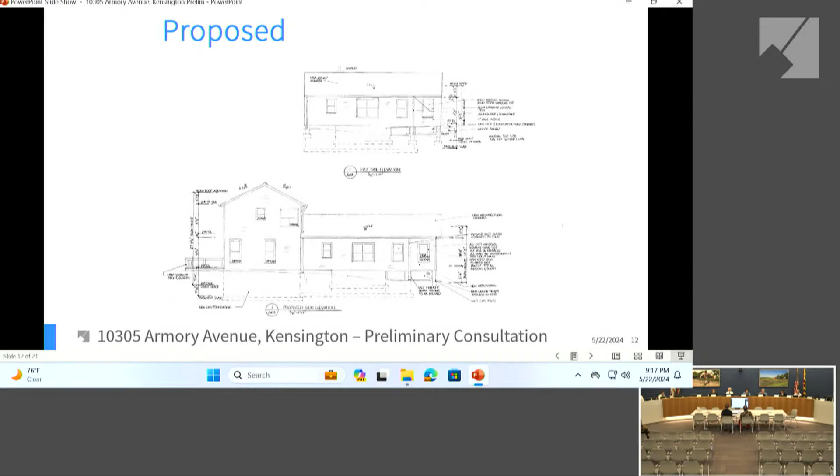First, one question - is the basement apartment existing? I'm sorry, is that basement existing? It is, okay, just wanted to clarify that one.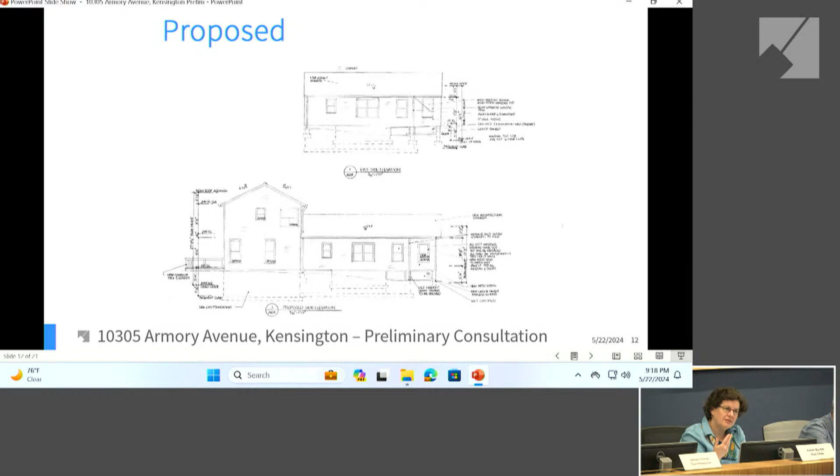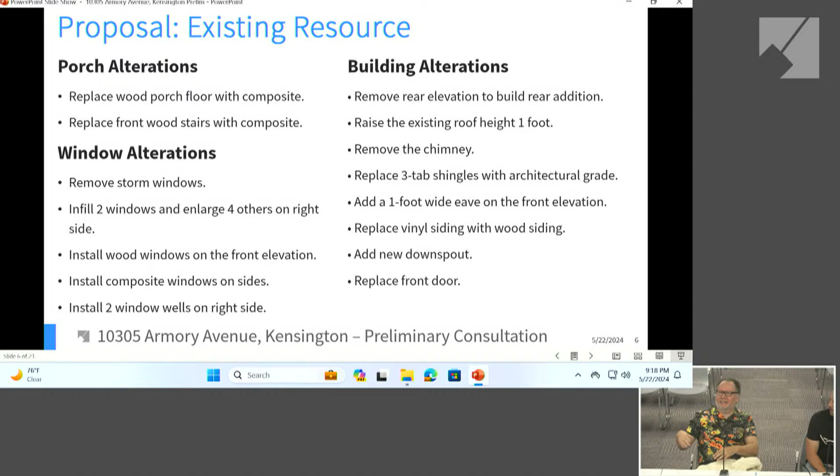Yeah, you have your work cut out for you on this one. Small houses are hard to double in size. And we get a lot of HAWPs and preliminaries through here where people are doubling the size of their house, and sometimes it's a really large house and they're doubling the size. So we feel for you, I mean we really do.

But we do have requirements that have to be met, and that long list is just a full-on list of everything you're going to have to do to get this house to a point where we will approve it. There are a lot of different elements - finishes, materials, appearance, existing versus what you want to do new, which we're not going to let you do possibly, like taking out windows and putting in new ones - that may not fly with us. So it's really good to do all the homework you can do on this to figure out what we will let you do, and then just go straight for that.

I think you really should consider the setback issue and try a one-story and see how that works going backwards. Don't think of it as one of those rambling one-story houses that just keeps going and going, think of it from a new perspective. It would be easy construction, and you'd have to deal with the setback, but it might not be a bad thing if you do rooms on one side with a corridor going down with a lot of glass on it, so they get all the light from the yard.

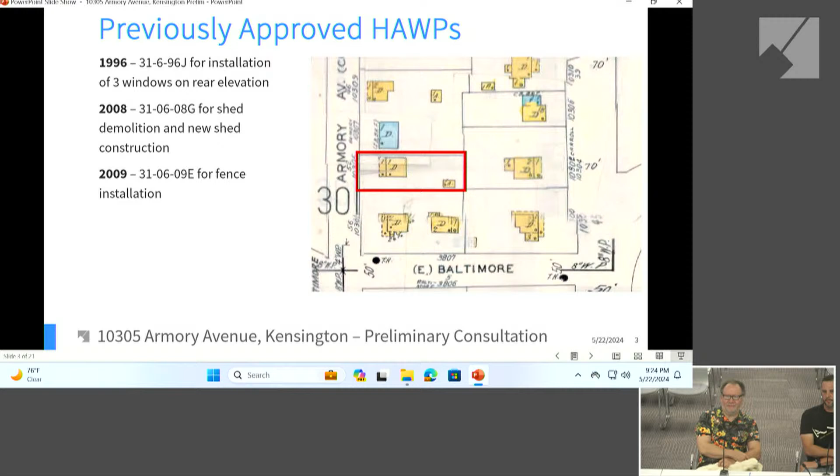The one thing I didn't anticipate is how long this could take, and the homeowner is concerned about time. That was his comment, because if this takes like 4 more sessions, I'm not sure if he's going to want to invest into that, and basically that's sort of the thing.

You will be doing, your owner will be doing one more preliminary at a minimum. And that's assuming a plan is developed that will be good enough to come through a preliminary. Then after that, when you get the drawings, the plans you present to us have to be on their way to being permit level, for a HAWP. So there will be at least 2 more presentations to us before you go for permit.

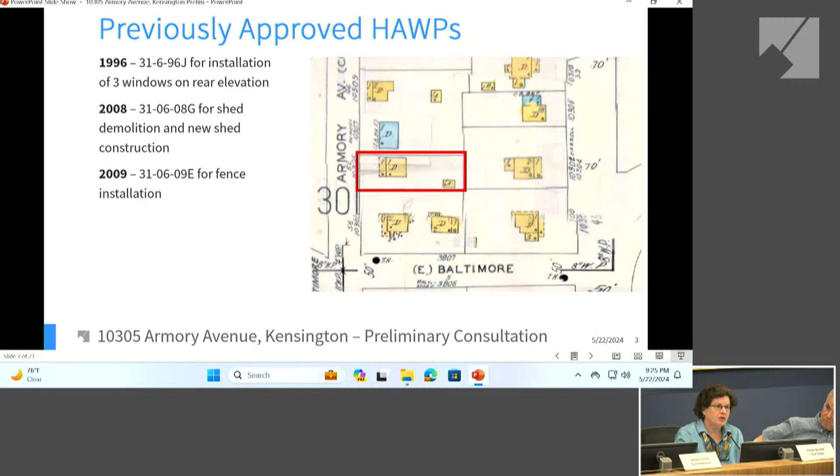So that's why you have to do all your homework up front and deal with a lot of stuff from permit, from the county. And then because you're in a historic district, the owner has to deal with that too. As the contractor you're going to have a steep learning curve, but you really do have to get that plan and the elevations sorted out realistically for what's going to be approved, because you don't want to come back here any more than you have to. It needs to be approvable when we see it next in the next preliminary.

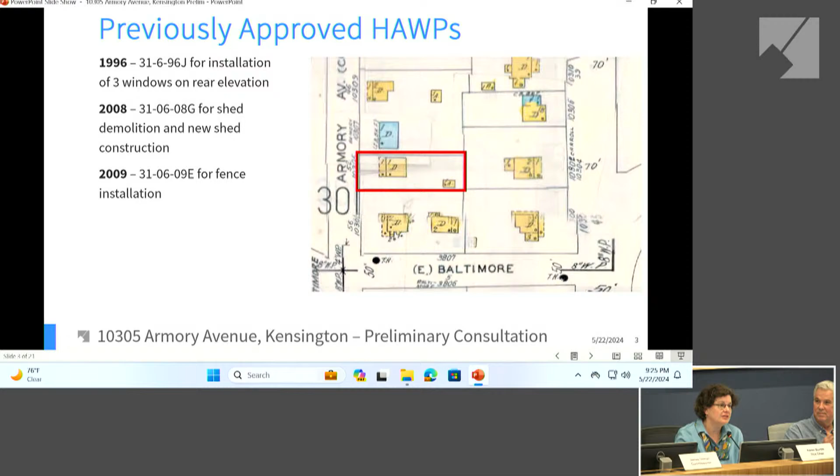If that's it, I wish you the best of luck, and staff will help you, so good luck. Thank you. Thank you for coming forward. We do appreciate seeing these, and as you saw tonight, some evenings are really interesting. We get a lot of variety, and tonight's one of those nights when we get a lot of variety. All right. Okay. All right. Thank you very much.